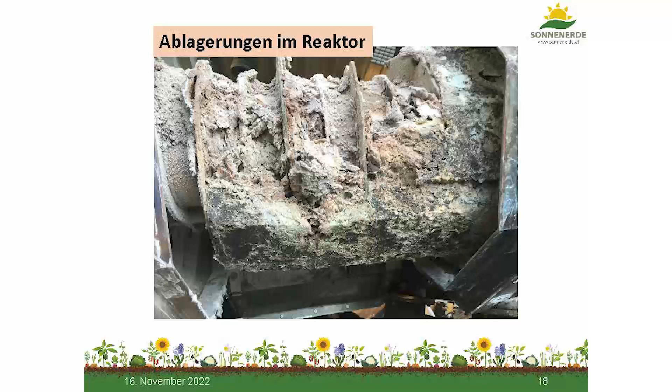And I was very happy because we managed to get this through as an additive to manure with the authority. They approved it. That is a great opportunity, or would have been. But the problem is, if you check the system afterwards and you see greenish, yellowish deposits and slagging and agglomerations that you didn't see before. And if you open the reactor because it's out of order, it's covered with dirt, but it doesn't only come from the trial, but the greenish yellowish color comes from the trial. The central tube of the cyclone disintegrates. This means that something happened.

We tried to research it, and the answers were that is impossible. Attempts or trials with boric acid, that's what happens. And others said that can't happen. So we were careful afterwards, but not too careful because we tested another thing. Then we used residual waste. That was one of the most beautiful trials for me.

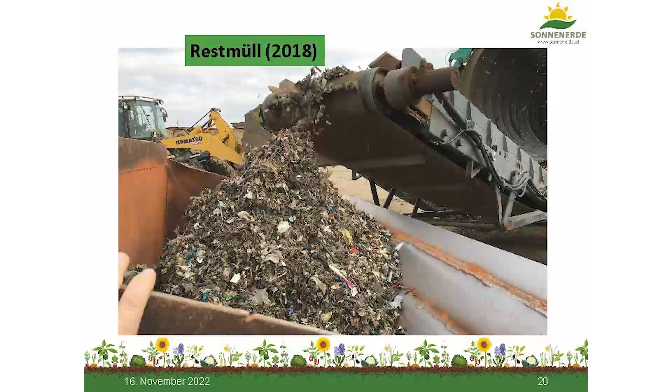That was very exciting. If you look at that after sorting it, when you put it all together, there are many fibers, pulp or cellulose fibers from sanitary pads and diapers, etc. Nutrient-rich material to produce high-quality products. We chipped it, we pyrolysed it, and it worked well. We immediately sift the product into separate fractions. And if you have a closer look at it, in the more coarse fraction, 2 to 5 millimeters thick, there was a lot of glass in it.

I wouldn't have expected that. And we said, okay, can we sort glass out? Yes, that is possible. And we discovered a machine not far from where we are that is able to blow out glass. So it's detected and air pushes it out of the rest of the material.

And you get very pure glass, and this glass has very high quality, and you can reuse it to produce bottles because the temperatures are so low in this pyrolysis process that you end up with a very high quality. That was a very important finding. Pyrolysis of residual waste would be a first great step to separate the different sorts.

And all the raw material included in the pyrolysate can be extracted with different materials, and we use it to produce bodies like troughs. That was our ideal. This pot on the left was the first attempt with a wax binding agent. It's pure residual waste produce.

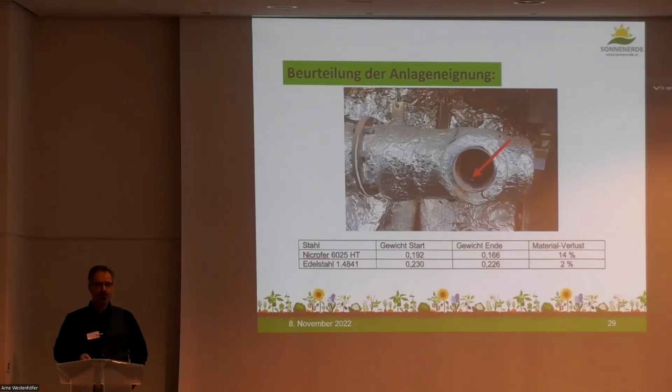And then we started another trial. Opening the system again, we saw that something might have happened. We should look at it. We introduced steel plates, different types of plates, into the exhaust gas tube, and we realized that we have a material loss of 1% per hour. So in theory, in 100 hours, the system would be gone.

And we found out the reason because we work with the technical college at Pinkafeld, and they carried out many flue gas measurements. And the devil, so to speak, is chlorine and sulfur. We identified it immediately. We can remedy that by adding lime. So we added lime immediately.

And it became more homogeneous with the screening system. Now we know that you can't do that in the long run. You would need to find a different technology. But the aim was to carry out the next trial right away, and it worked very well. So this is the result.

Chlorine and sulfur are the elements you need to be careful with. You can add lime and can solve the problem. Every combustion engine does that, or combustion system, to keep the system functional. And it's a perfect first step towards material separation.

I think there is no single waste that needs to be deposited somewhere. You can turn any raw material into great products, and pyrolysis can be a first step towards a perfect separation of the substances.

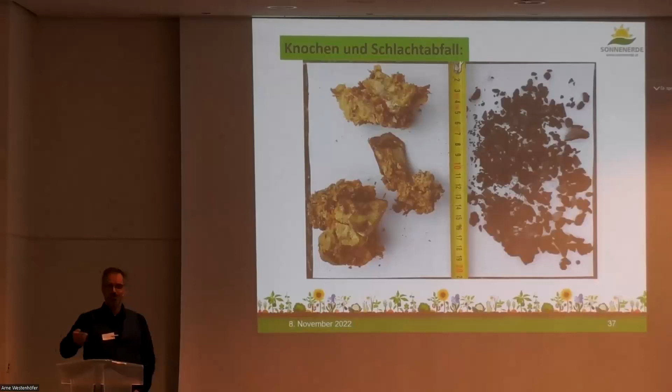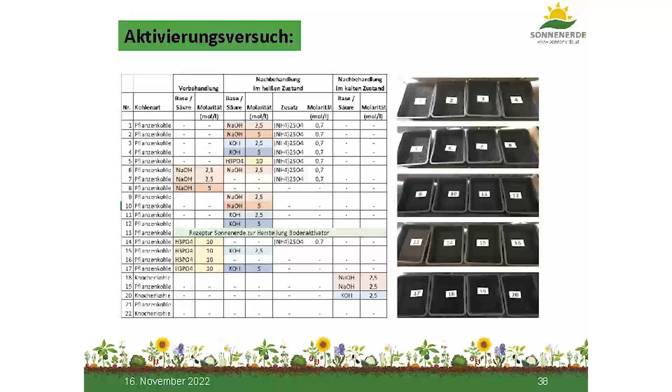Yesterday, we also had a great trial that we also did. We heard about it with bones and slaughterhouse residues. You don't need to reduce it in size. The bones basically disintegrate during the process, come out of the auger and are already reduced. We try to activate with many different acids and alkaline solutions to improve the ammonia absorption.

Let me just give you some results. If ever you've been working with acids and alkaline solutions, it's great, just be a little careful when you do it. It's not always that evident. We tried it, and the first thing we realized after the pyrolysis, the structure of the biochar was lost.

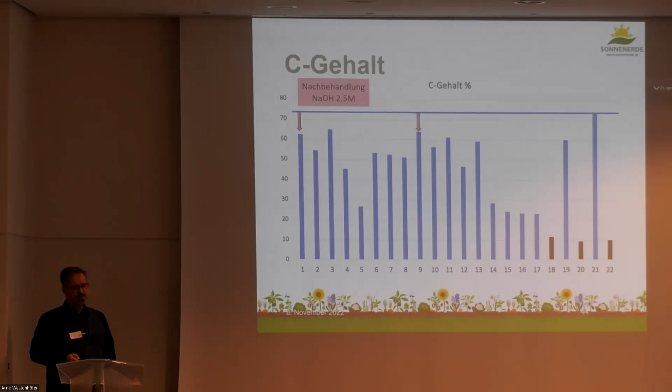you see that there are biochars with little carbon. They were treated with phosphoric acid pre-treatment or follow-up treatment. So this is why it's not an option. And those treated with alkaline solutions, depending on the concentration, have a carbon loss of 10%, be it potassium or sodium. And if you double it, it's 10 to 15%. Doesn't matter if it's cold or warm, pre or after treatment, we lose carbon.

But that doesn't really matter. If you look at the sorption capacity, you get to the baseline of the untreated biochar, and you see already that the sorption capacities have doubled. And in higher concentrations, it's even 4 times more. So this is a good option. This sample 13, that's our activator.

Ammonia is also released. It can't be bound additionally, even if you increase it. So always the same problem. If you use acids or alkaline solution in a reactor, you have problems. You can do it, but don't do it for a long time. This means pre-treatment is not an option to activate biochar, because the system is destroyed.

And after-treatment is a great idea. You can achieve many things with it, and it's easily implementable. Continuous operation is possible. The carbon content is reduced, but other properties in some instances get better.

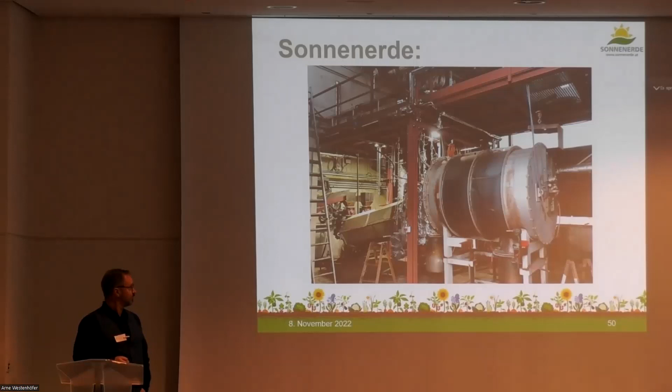Our former pyrolysis reactor has been existing only in that type. It's no longer a screw. It has been rebuilt. And we are still using spelt husks and sunflower husks, no paper fiber anymore, because 3 years ago we received the approval to produce biochar, and then I didn't want to discuss that topic of biofibers.

And this is why we found a very beautiful substance, a raw material. It looks like a jam sludge, but it's strawberry seeds as a kind of mud. People don't want to have the seeds in their teeth when eating jam, and this is why it's sieved out, and we can dry it with the excess energy. And this is a mixture of the dried strawberry seeds with sunflower husks or shells.

So this is a good biochar. We can produce 300 square meters per gram and 75% carbon content. That's our status quo. This brings us to a new project. We have discovered a new material for a simple reason. Sieve residues are always there in any composting process, because without wooden material, composting is impossible.

The second reason is I work a lot with Stephen Joseph, who speaks about the char mineral complex. Pyrolysing minerals is a good idea. We heard that yesterday as well. There was a great presentation on that topic that really inspired me. So we decided for sieve residues just because they exist, because it's a great raw material, and because the energy has been removed already. I can achieve a higher throughput as compared to pure wood.

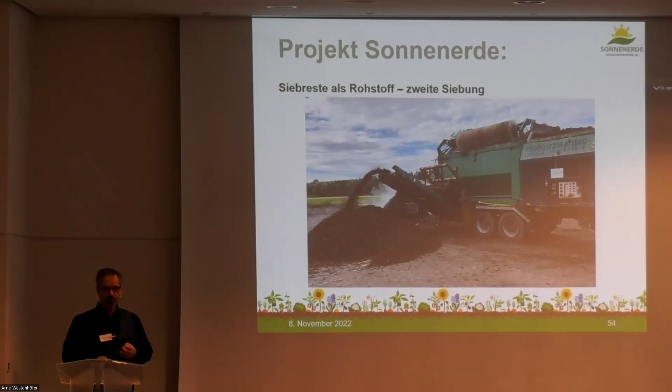What is interesting is the preparation. The sieve residues are stored for 2 months. They warm up and the remaining organic detaches from the wood. After 2 months, it's sieved again, 25 millimeters. The fine fraction was retransported and rededicated for soil manufacturing.

I'm sorry for that. And here, if you could have a sip of water, please.

And from this fine fraction, we can take out the remaining wood, and the coarse fraction is stored again for 2 months. It warms up again, and all the remaining organics detach. And here you see that there are many stones for a simple reason. We don't screen compost, only the finished soil. And with the sand and clay and mud, you add stones.

This means the challenge is how to take the stones out. We screen the residues again and send them through a washing machine. The stones sink to the ground and are extracted. And this brings us to the washed residues, which are chipped to 30 millimeters.

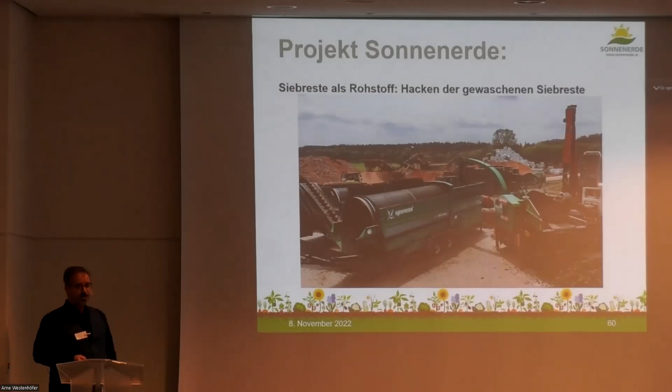And what was important to me was to have agro-bio quality according to EBC, so PAK value below 1 milligram. That's the highest quality. I think 4 is the limit for agro-bio, the threshold. I want to have less than 1, and there's just one system. Biomacon is the only producer whose biochar was the purest char.

But then you had many tubes and ducts, and hot gas always causes problems. Not in the first year, not in the second year, but after the third or fourth year, things get really tricky if you use too many ducts. And I said, I don't want that. And I don't want any combustion chamber heated up with liquid gas. I don't want any burning chamber at all.

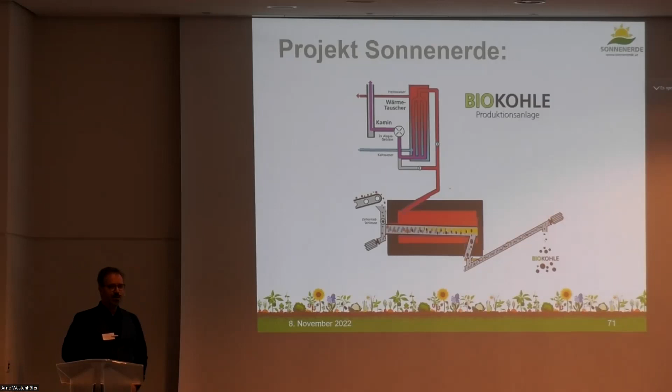I just want to have a reactor. It can be as easy as that. And the reactor only consists of a closed tube that leads to the burning chamber. And then the char is pushed onto a conveyor belt and is transported out. And the gas escapes upwards and is burned.

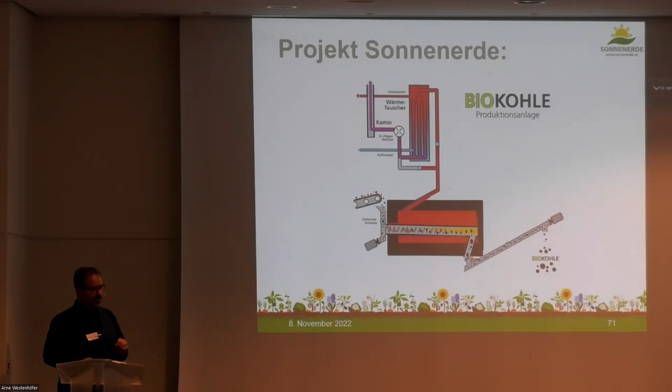And if you deal with pyrolysis, before you think about anything, you should know the oven of Stephen Joseph. For 30 years, he worked with biomass charring and pyrolysis, and his latest development is a Kon-Tiki with throughput process. It's just a burning chamber with a transporting system pushing the material through, and the oxygen can't go down. I have a direct heat transfer from the flame, and I can run small systems with a high throughput.

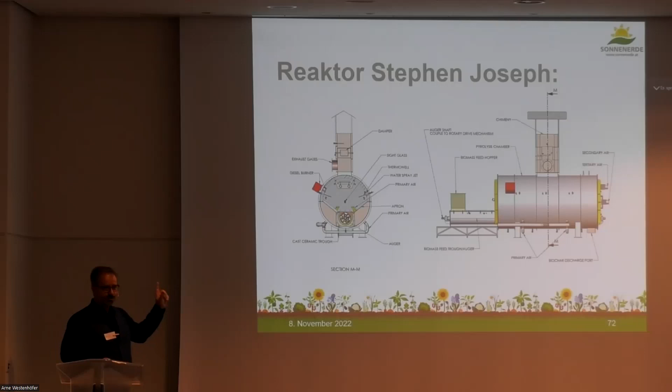And this system also has a disadvantage, and that is no heat reaches the material at the bottom, and you have to whirl it, you have to mix it, a high number of revolutions of the system so that everything is heated equally. And this is a disadvantage we compensated for. So we have used our experience and based it on Stephen Joseph and biochar.

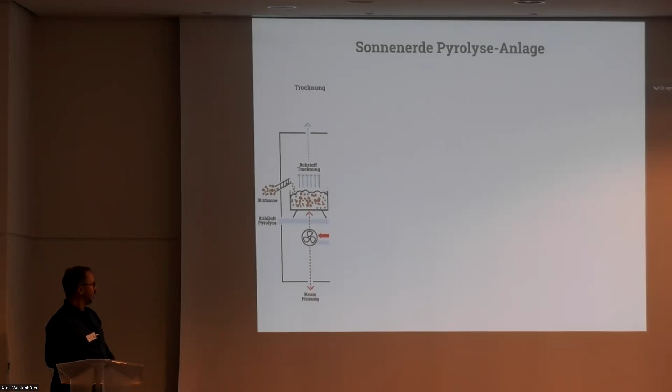So the system is one thing, the facility as such. But what is equally important is the underlying concept, because we're not only talking about pyrolysis, but what else is happening? This is our concept that we used as a blueprint for composting systems. This means you need absolutely dry feedstock. It doesn't make sense to introduce a wet or moist substance. That was the idea of the past. What system can use moist material? That doesn't make sense. It needs to be dry. We have enough energy per line, 300 kilowatt, to dry the feedstock.

It's then introduced into the stove or the oven. The tube isn't fully closed. The last third is opened, is widened. The material is pushed through slowly. This leads to a gradual heating, and then at the end, the flame energy is applied onto the material, and with that, we can increase the throughput. The hot exhaust gas is suctioned away to the top, and it's cooled by air to 300 degrees.

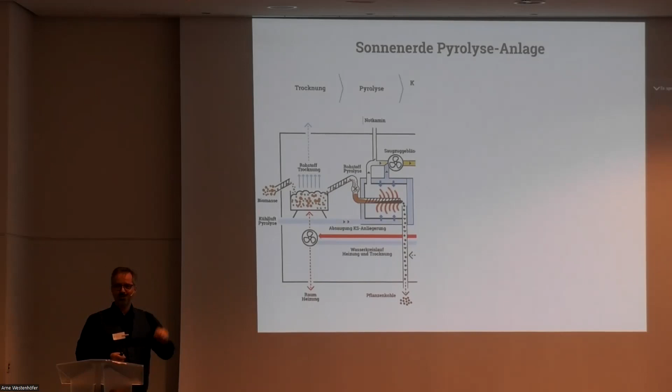I don't want to cool with air. That's my appeal. I want to have an ORC in the middle. If somebody has an idea of how I can lower the degrees from 900 to 300 with ORC, please get back to me after the presentation and I'll invite you to coffee.

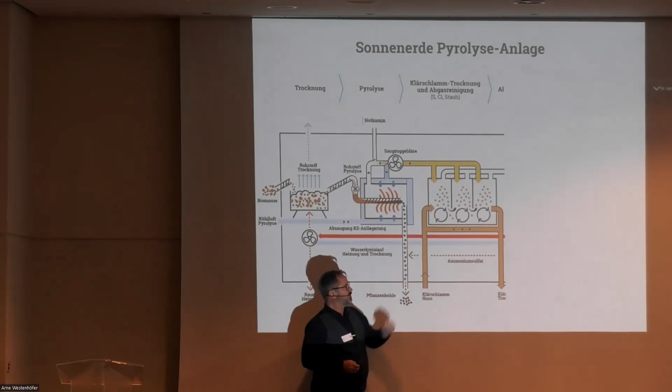Then we have got 3 different chambers, and then it exits the system. And we do contractual work. There's a new regulation, waste use regulation, and all the sewage sludge needs to be burned, and our systems need that. We offer the service to do that.

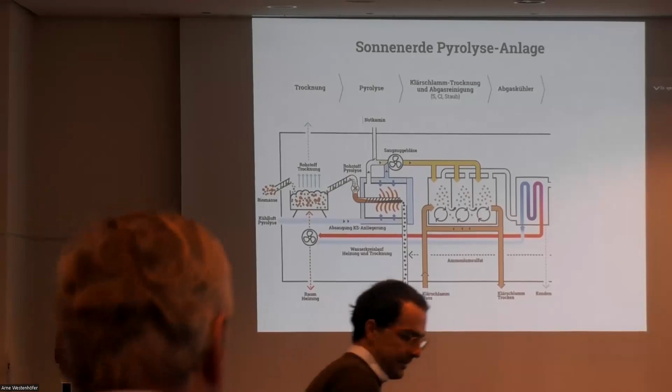The flue gas is 100% moist and 70 degrees warm. We can reduce the temperature to 40. What happens if you condense the water? The energy comes back. This means we have a dual energy use during the sludge drying process, then condense it out, and then the low temperature energy is used to heat all the buildings we have. So the thermal heat use concept is very important.

The condensate goes to a sewage plant, and then we also have a lot of nitrogen that comes out of the sewage sludge, and I need this nitrogen to load the biochar, ammonium sulfate production. This is applied to the biochar, and if we don't need it all, we sell ammonium sulfate. We produce a lot of it, nitrogen that we can extract before the incineration process. And then at the end, we've got our biofilter. And that's it, biofilter cleaning.

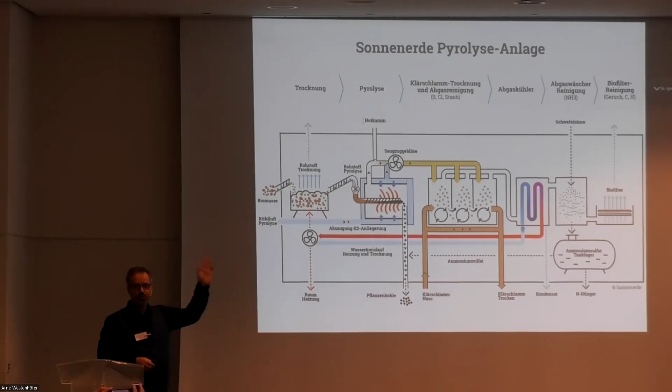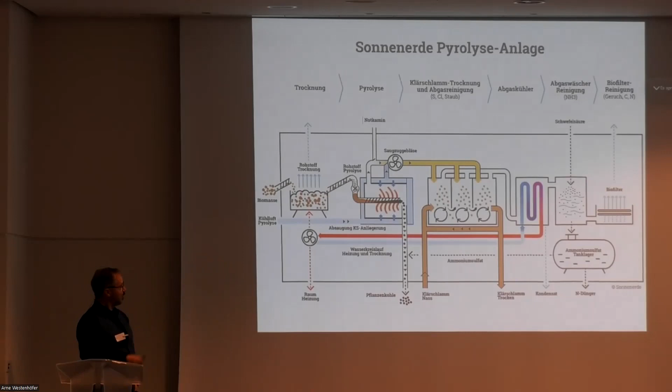This system was approved, and listen up, without any flue gas measurement. We don't need any permanent measurement because it's impossible to have pollutants in the exhaust gas. Nothing can happen. The sewage sludge drying process is our cleaning process. All the elements that might be hazardous are eliminated. In the original state, sulfuric acid is even introduced so that it doesn't get too alkaline. We have a dust filter included, and we extract the nitrogen.

And the latest discussion we've had, NOx. I'm sure there is NOx. And I need to say thanks to Stephen Joseph.

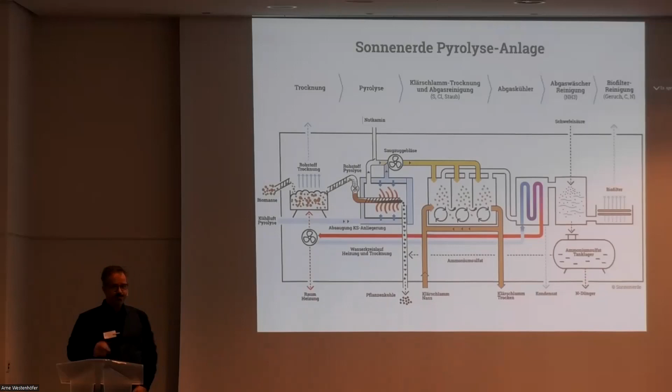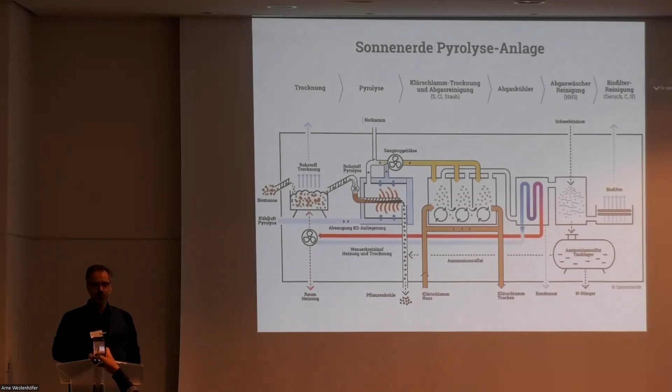At this point, where the fabricated biochar is in the oven, in the furnace, if you apply water, pure hydrogen is produced. And this is our reducing agent for nitrogen. It works better than urea. So this means you can reduce NOx to any value close to zero. So this means pollutant emission is impossible in that system.

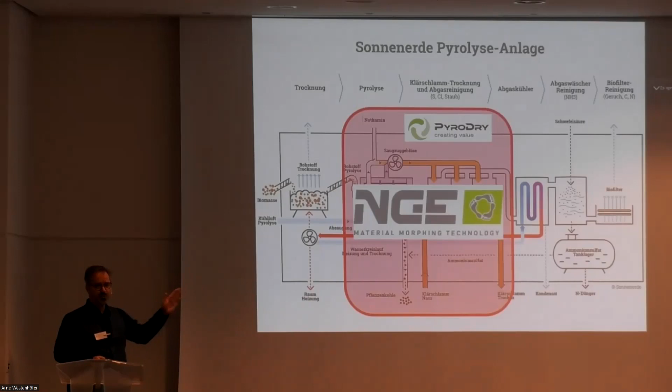This is PyroDry made by NGE. This company has introduced our system to the market. And if you're interested, what's important is everything that's around the actual setting. We'll invest 7.3 million into this first stage with one line, and then we will expand it to 3 lines. That will be the final scenario.